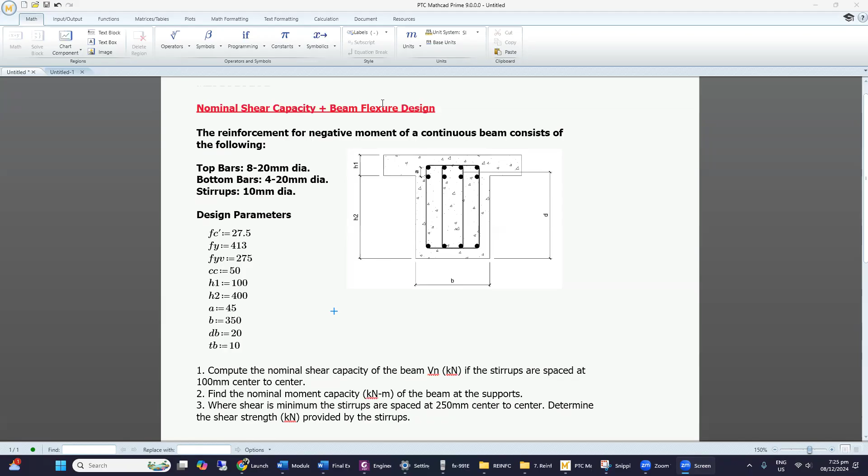Okay, good day everyone. So we have a sample problem here. The topic is all about shear capacity plus beam flexure, combined. The question involves shear capacity and nominal capacity of the beam.

So for the sample problem, given is 8 pieces of 20 millimeter diameter bar as top bars, and 4 pieces of 20mm diameter bars at the bottom. For the stirrups, the diameter is 10 mm.

It says the reinforcement for negative moment of a continuous beam consists of the following. When we say negative moment, the tension is at the top and the compression is at the bottom. So this rebar resists the tension - this is the tension steel. And this one is the compression steel, CS.

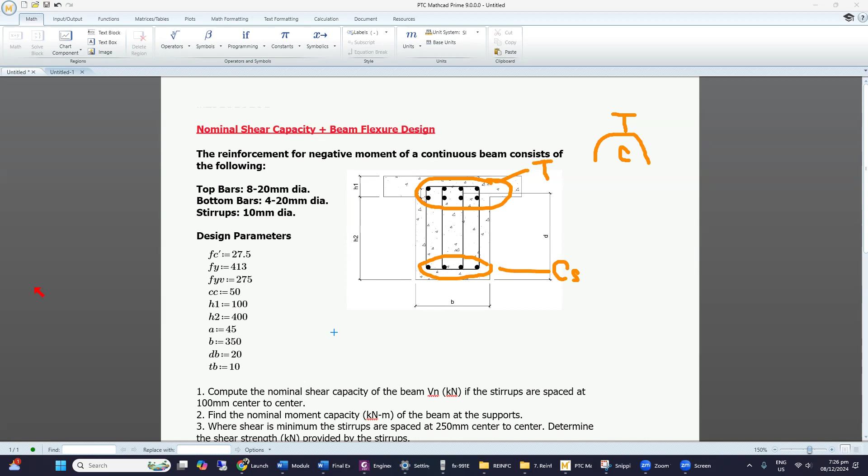If the beam is doubly reinforced, this is included. But if the beam is singly reinforced, this is neglected for the computation of the nominal or maximum capacity. But if it's doubly reinforced, it's really included. So again, this one is the tension steel - that's our T.

So given the parameters: FC prime is 27.5, FY is 413, both in megapascal. We also have FYV, 275. This 413 is the yield strength of the main bar.

That's the main bar, our As. But this FYV, this is for the stirrups - the yield capacity of the steel for the stirrups. CC is the concrete cover, from the extreme fiber to the edge of the stirrups - edge, not the center.

It's at the edge. Then given H1 and H2: H1 is the thickness of the slab, H2 is at the bottom. So total depth of the beam is 500 - H1 is 100, H2 is 400, so total is 500.

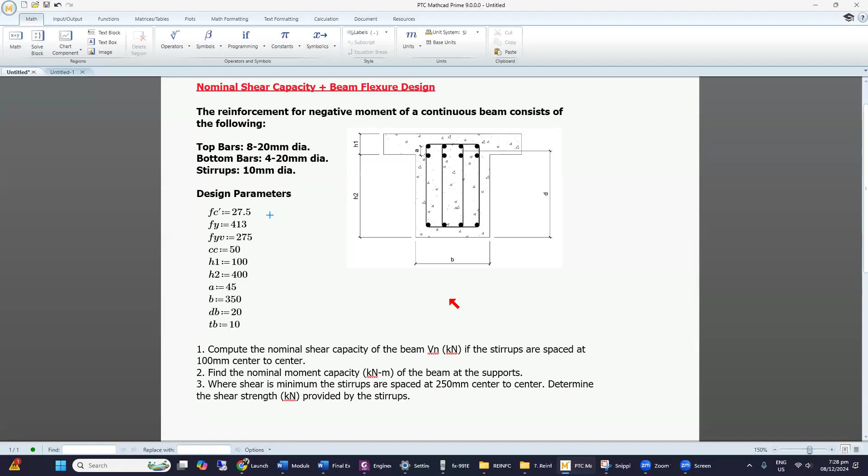So there are three questions. Question one is to compute the nominal shear capacity of the beam, VN, if the stirrups are spaced 100 millimeters center to center. So what's being asked is VN - that's the nominal shear capacity of the beam.

If we recall, VN equals VC plus VS. VC is the shear capacity of the concrete and VS is the shear capacity of the stirrups. We know that VC equals 0.17 times the square root of FC prime,

times B times D. And for the stirrups, the shear capacity is area AV times FY times D over S, where D is the effective depth.

So given the spacing, 100 millimeters, and D is the effective depth. So that's it, it's simple.

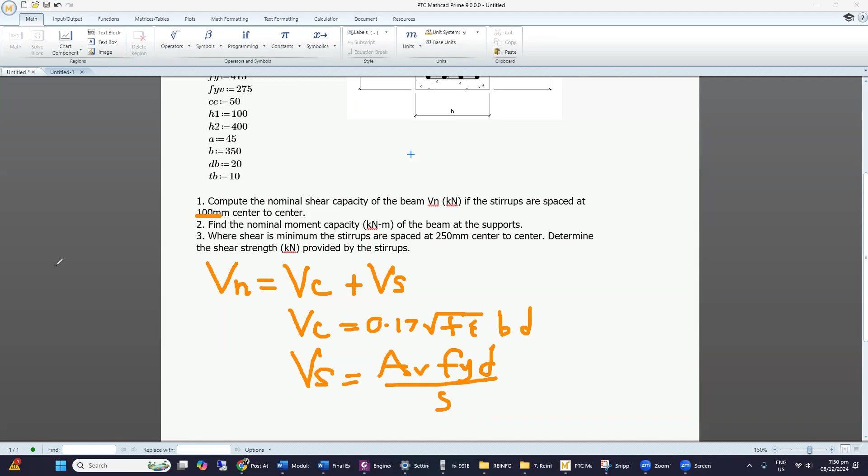Next is number two: find the nominal moment capacity of the beam at the supports. Before we get this, we need to verify first what kind of beam we are analyzing - maybe it's singly reinforced or doubly reinforced. We need to check the type of beam because the capacity is very different between singly and doubly reinforced.

Number three is similar, still about shear capacity of the stirrups alone - the shear strength provided by the stirrups, considering 250 millimeters center to center.

Okay, so let's start with number one: compute the nominal shear capacity of the beam. Let's write the formula for clarity: VN equals VC plus VS. We haven't defined VC yet, which is why it's highlighted in red.

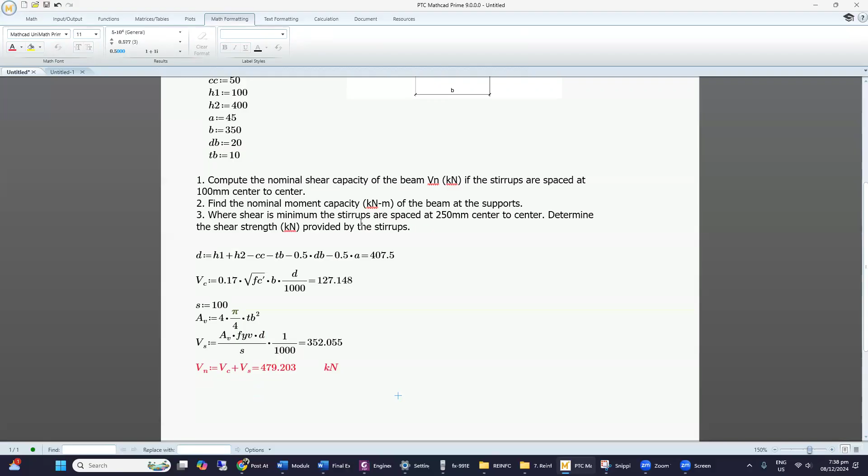Check first the type of beam. Check natin, anong klaseng beam ba siya? Singly reinforced ba siya or doubly?

So how to check? Compute first the maximum steel area that the singly reinforced beam can be provided. Check muna natin yung maximum area na pwedeng natin mailagay sa singly reinforced beam.

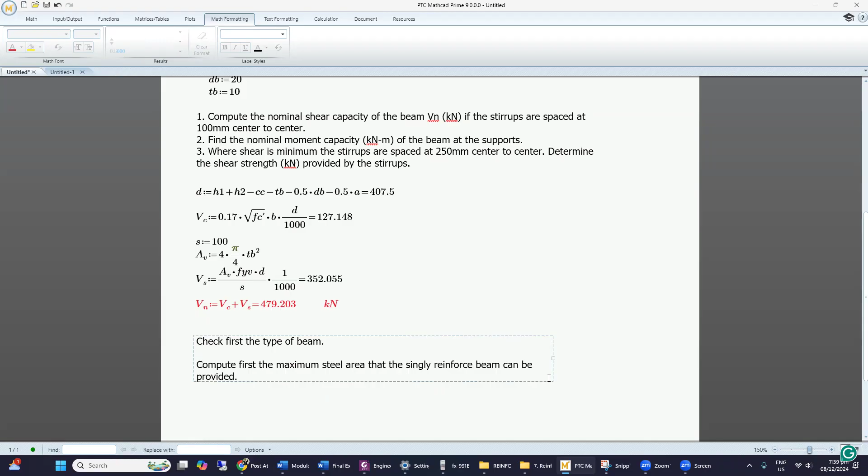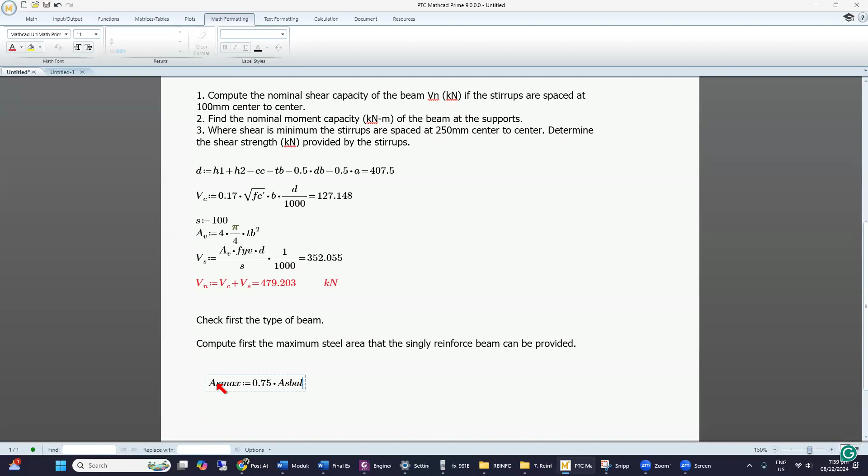Okay, so As max, i-compute natin yung As max. Ano ba yung As max? Yung As max natin is 0.75 of As balance, 75% of the As balance. So balance steel area.

Dapat yung maximum steel area natin is 75% na ng balance steel area. Okay, so if hindi nyo po yan naintindihan, I will discuss natin. Bakit 75%? Okay, so to do that, first is kailangan muna natin i-compute yung actual As provided by the beam.

So ito yun, actual As. So again, ito yung kino-consider natin na tension. Yan yung i-check natin, if singly reinforced ba siya or doubly reinforced.

So As natin is 8 pieces na 20 mm. So i-compute na natin 8 pieces na 20 mm. Okay, ito, copy ko na lang yan.

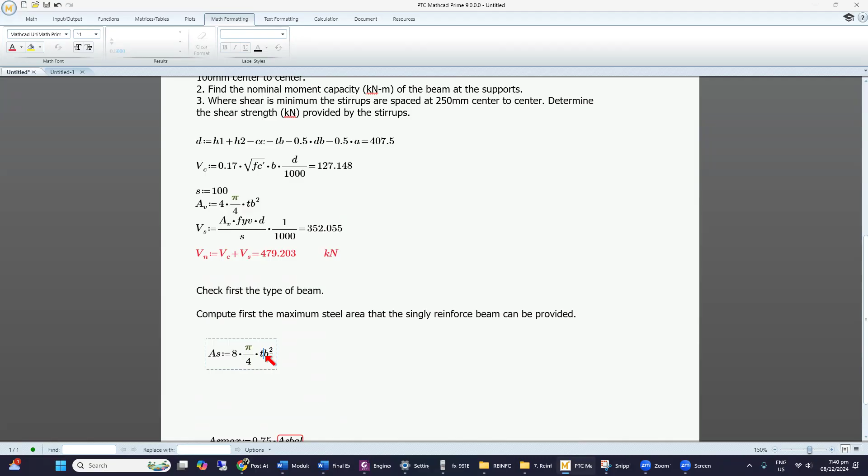Yung lagay natin dito is dB, Diameter of the bar na siya. So 8 pieces na 20 mm. Okay, so that's the area.

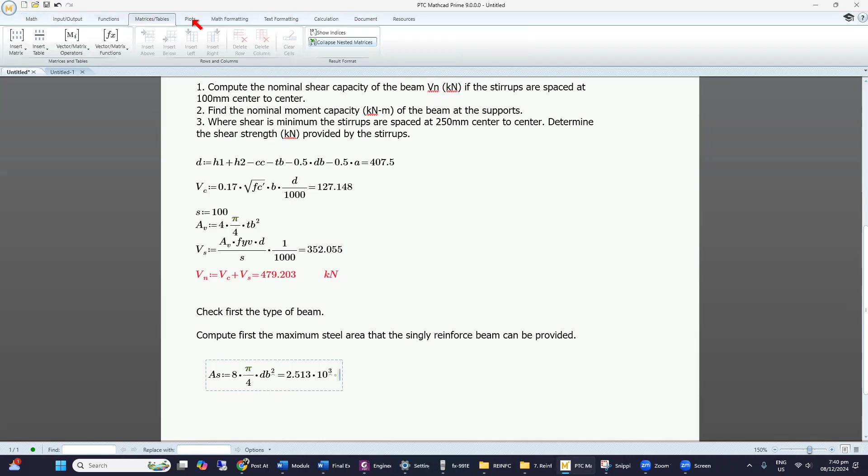So that's 2513.274. If this is less than As balance, ibig sabihin, kapag yung As is less than As balance, ibig sabihin yung steel is nag-yield first. Unang nag-yield yung steel.

Ibig sabihin, Fs natin is equal to Fy. If yung As provided or yung actual As na nasa section, 8 pieces, is less than As balance, ibig sabihin nag-yield yung steel. Unang mag-yield yung steel compared to concrete. Ibig sabihin, Fs is equals to Fy.

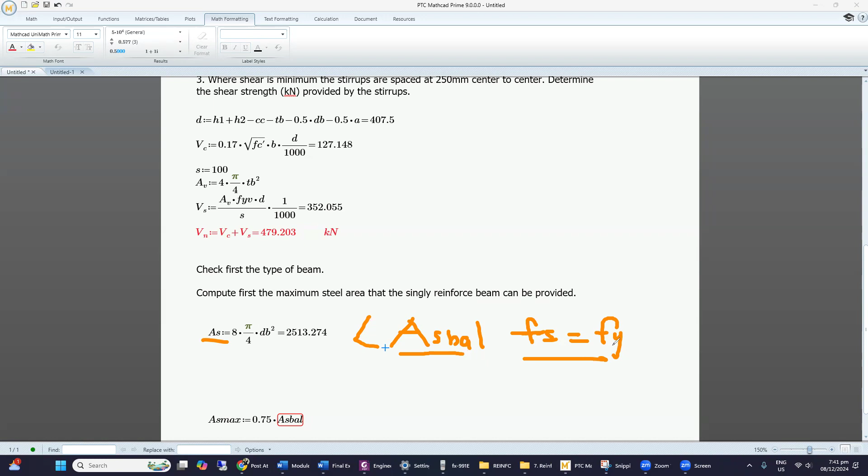So i-check natin kung nag-yield ba siya. I-compute natin yung As balance. Okay, to compute As balance...

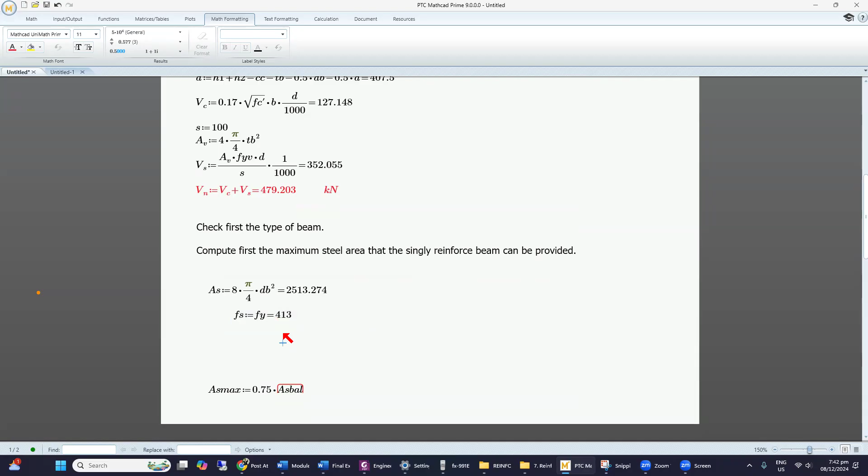We need to assume first na Fs is equals to Fy, na 413. So this is our first assumption. Assume muna tayo na nag-yield muna yung steel before the concrete, na Fs is equals to Fy.

Okay, so with that, meron tayong formula na Fs is equals to 600, D minus C over C. Yan yung formula natin. So with this formula, makuha natin yung C.

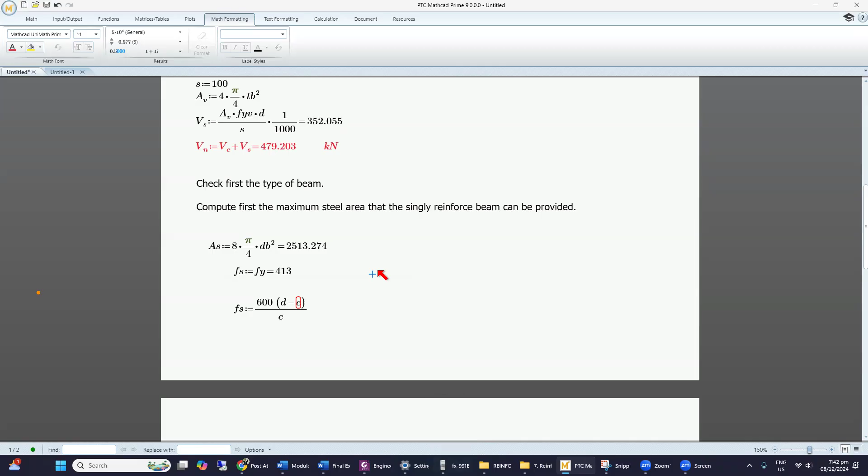Given na yung D, given na yung Fs natin dahil nag-assume tayo na Fs is equals to Fy, yung makuha natin dito is C balance. Okay, so siguro i-compute ko na lang, i-calculator ko na lang. So C balance.

So ulit, nag-assume tayo Fs equals to Fy. So 600 D minus C. So D natin is...

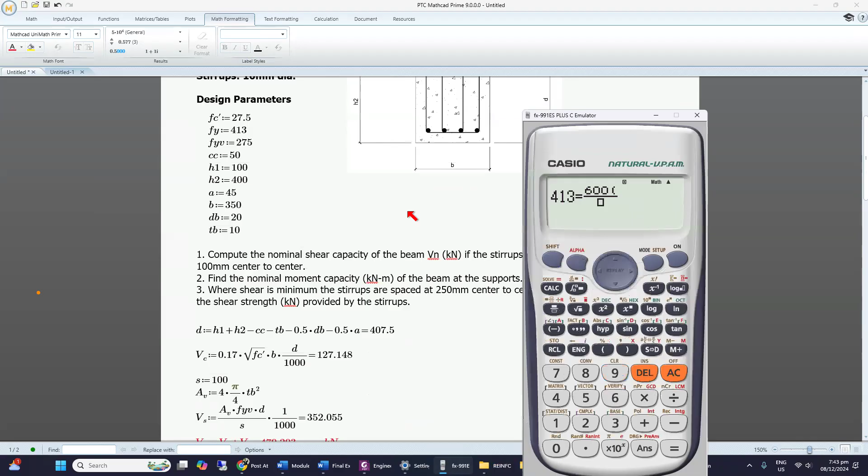Ito, 407.5 minus alpha x, so minus C, itong formula na to over C, so makompute natin C balance. Okay, C balance is 241.36.

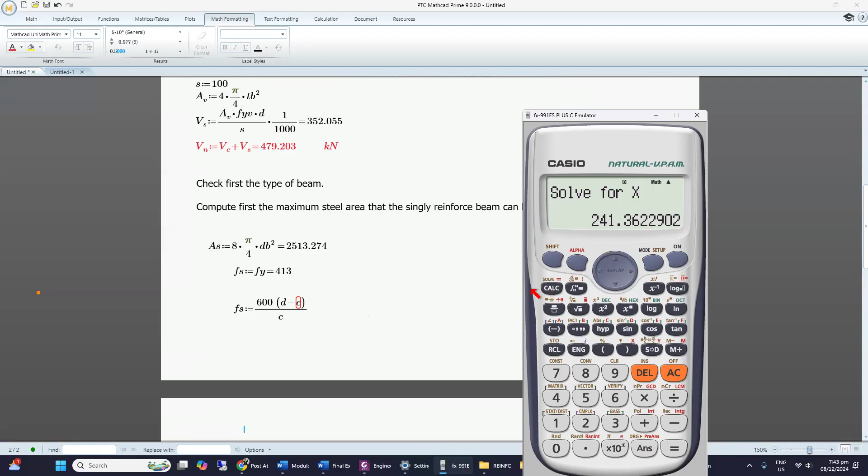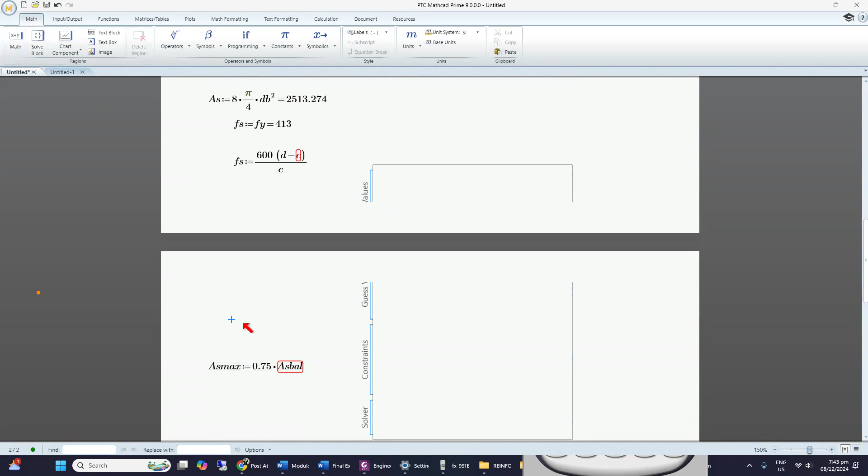241.36. I think pwede naman natin automatic makompute yung C balance. So we'll try dito. We'll try to compute C balance automatic. Yung ganina, kinamit natin is calculator.

Okay, so C is equals to, assume natin na 100 yung C. Then yung solve natin, C is equals to, find C. Wag na lang, calculator na lang. Okay, C natin, so Fs is equals to Fy, di ba? So makuha natin si C. So that C is the C balance.

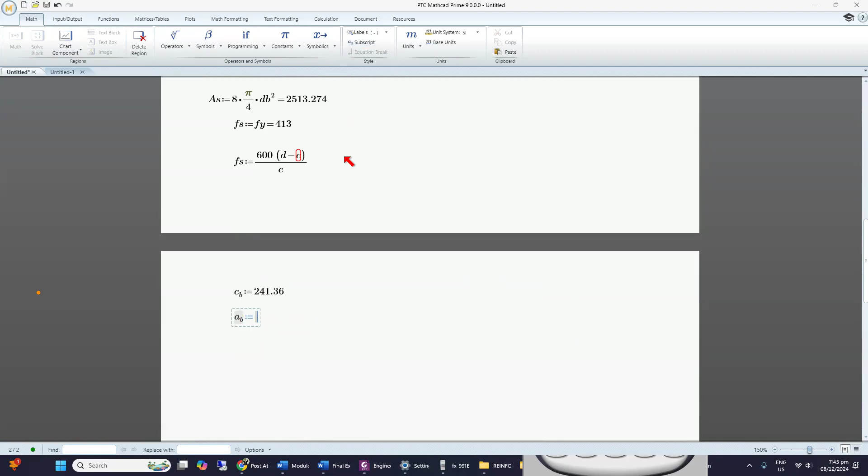C balance is equivalent to 241.36. So with that, we can compute for the depth of the compression fiber at balance condition, AB, which is beta times C. Beta natin is 0.85 because FC prime is less than 28. So 0.85 times CB.

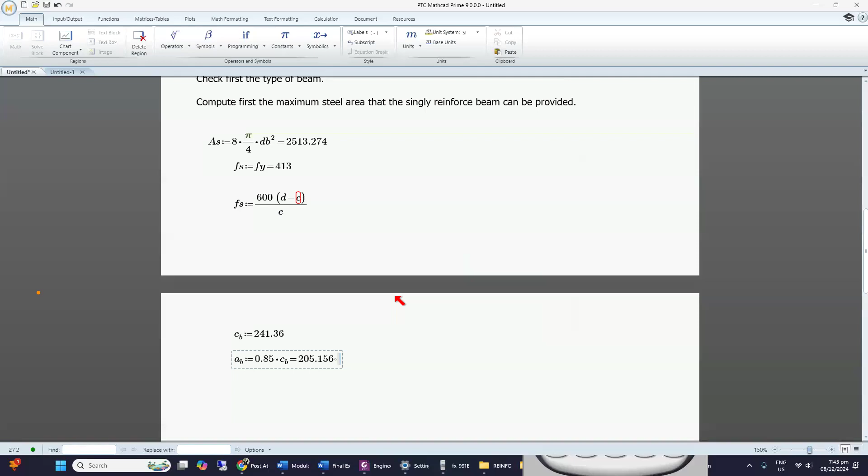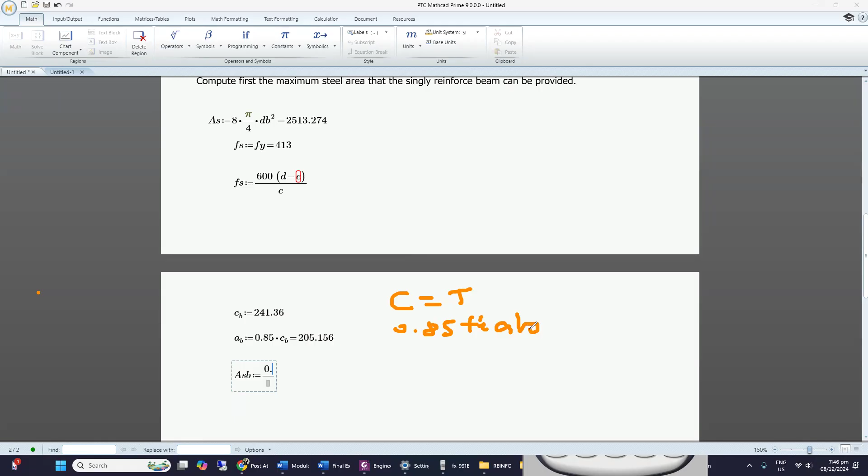Yan, so ito na yung AB natin. So with this, we can compute for the As balance. ES balance is just, if ma-recall natin, C is equals to T, compression, tension. C is equals to T: 0.85 FC prime times A times B is equals to As times Fy.

So with this, given yung, i-compute natin is the ES balance. Yan, ES balance. So given yung Fy, given yung 0.85, yung FC prime, yung A times B, so with this makompute natin si ES balance. Okay, 0.85 FC prime.

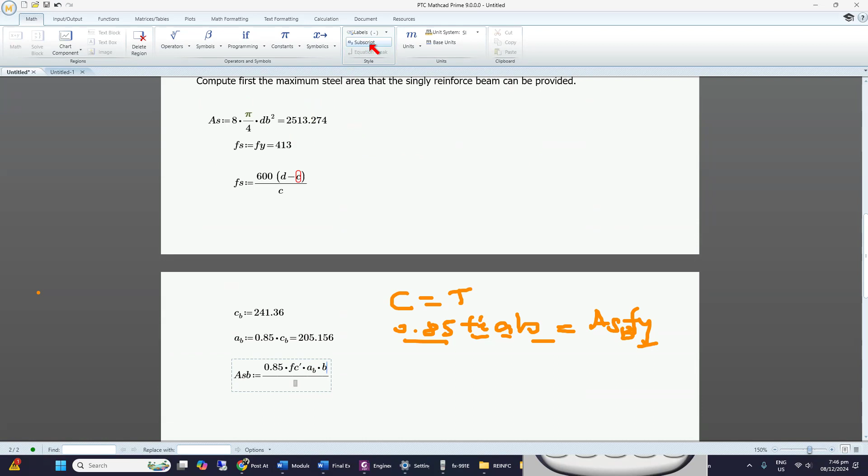So this should be A balance, AB, times B. Okay, B natin given na yun. Ito, B is 350. So over Fy. So ES balance natin is... saan na yun?

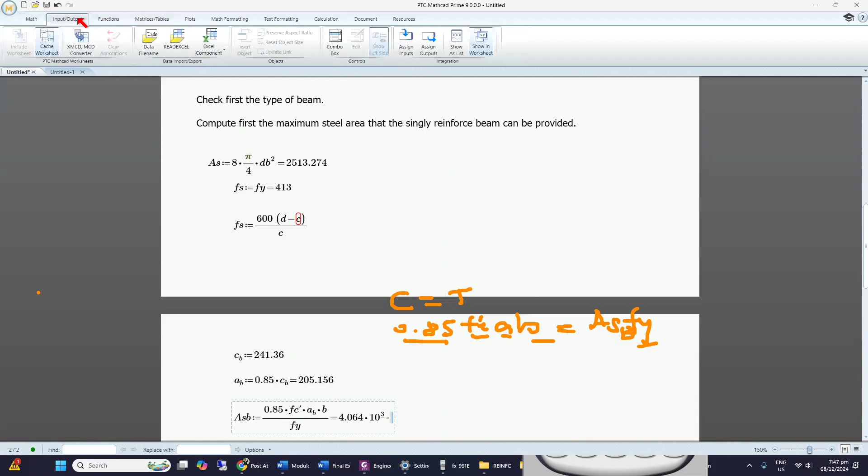As balance natin is 4064. So if we try to compare this to the actual ES, kita natin na yung As is less than As balance.

Ibig sabihin, nag-yield yung kuha natin. Nag-yield yung steel. Steel yield first, no? Yung tension rebar is nag-yield first. Okay, so with that, since nag-yield siya, Fy na yung gagamitin natin. So tama na to, tama yung assumption natin kasi nag-yield siya.

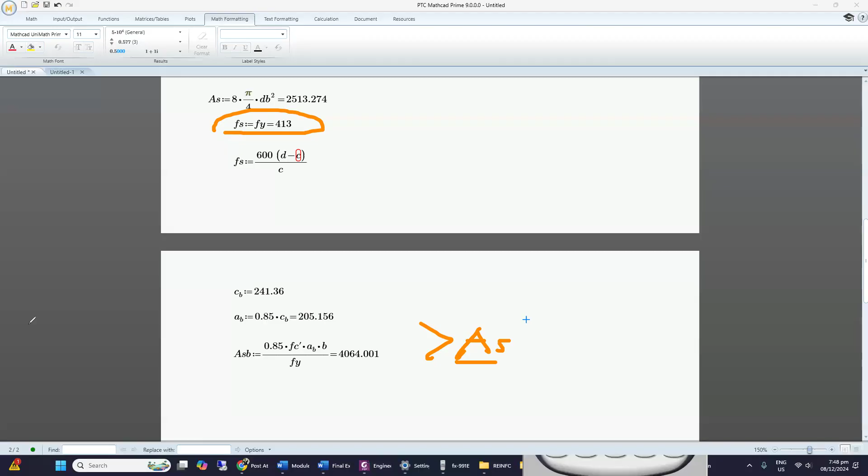Ah, if ever hindi siya nag-yield, no? If ever yung ES natin is greater than ES balance, hindi siya nag-yield. So mali yung assumption natin kanina, so mali ito, iba ito. Kapag hindi nag-yield, yung unang assumption natin is hindi siya tama. Okay? But since nag-yield siya, tama yung assumption natin, kasi yung ES balance is greater than ES. So masyadong maliit yung bakal na pinaprovide, kaya nag-yield siya.

Okay, so with that we can compute for the ES max. This is the maximum area that the singly reinforced beam can be provided, As max is 0.75 times As balance. Yan, so As max is 3048, still greater than As. So meaning to say, it is confirmed that this beam is singly reinforced only.

Singly reinforced beam. So with this, to compute for the nominal moment capacity of the beam, yung formula is just Mn is equals to, since nominal capacity yung hinahanap, no need to multiply reduction factor. It is only As times Fy, kasi nag-yield siya.

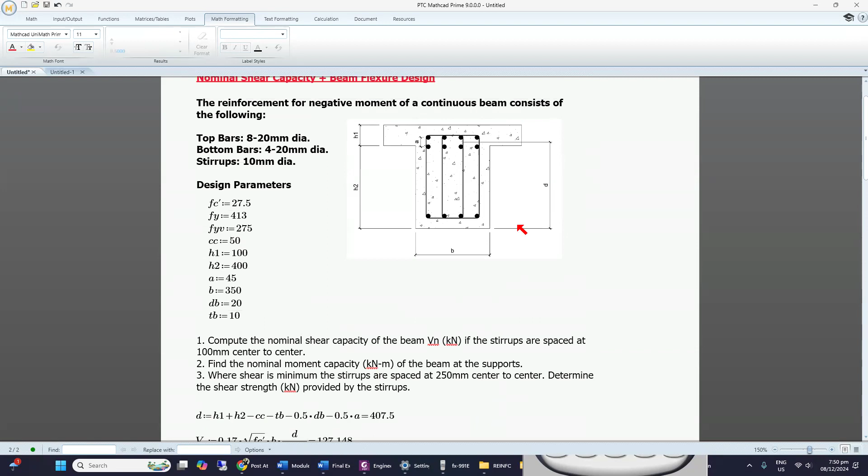Tapos, moment arm. Moment arm natin is D minus A over 2. Kasi yung compression fiber is nandito, yan, so yung distance is ito, papunta dito, so ito sa point na to. This is D minus A over 2.

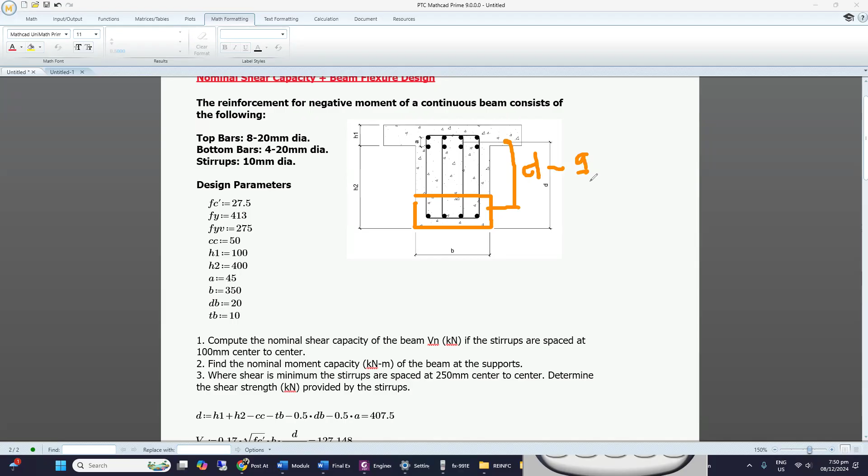So with that, continue natin. So As fy d minus a over 2. Ikot ko muna, decimal. Es Fy d minus A over 2.

Pero yung gamitin pala natin na A is dapat yung actual A. Actual A ng rebar na to. Okay, actual A na to. So with that, i-compute natin yung actual A. Para ma-compute yung actual A, still the same.

Ito yung formula, C is equals to T pa rin. We know that 0.85 FC prime AB, yung C natin, is equals to As fy. Given na yung As, given na din yung FY, nag-yield siya, confirm. Then 0.85 FC prime, tapos yung B. So yung kunin natin is yung A, actual A.

Actual a is equals to As multiplied by fy, divided by 0.85 multiplied by FC prime. Sorry, sorry, yung a niya is As fy divided by 0.85 FC prime AB, hindi BD. Should be AB, no? So wala na to, yan, 126.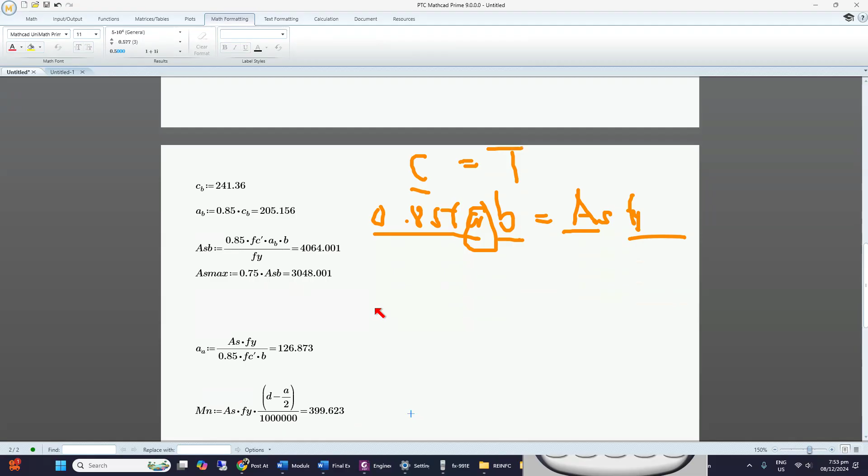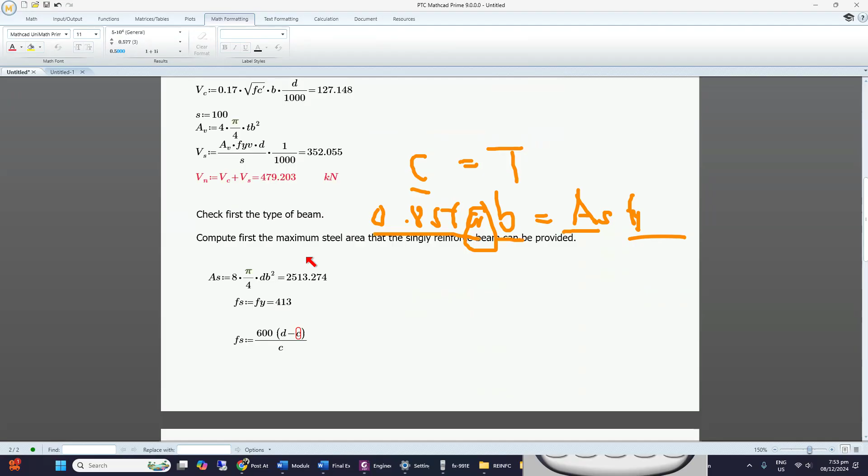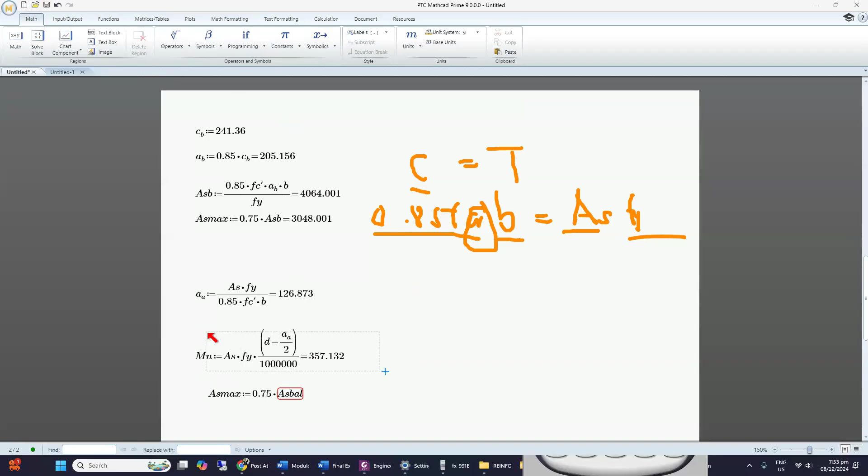So ES max, ES natin, yung ES natin is ito, 8 pieces. So 0.85 FC prime AB divided by FY. Tama naman siya. So ES FY, ES times FY times D minus, this A must be A actual. A actual pala yan. Okay, yan, so ito na yun, ito na yung tama, 357. That's the nominal moment capacity of the beam. Yan, ito, ito na yung sagot sa question number 2.

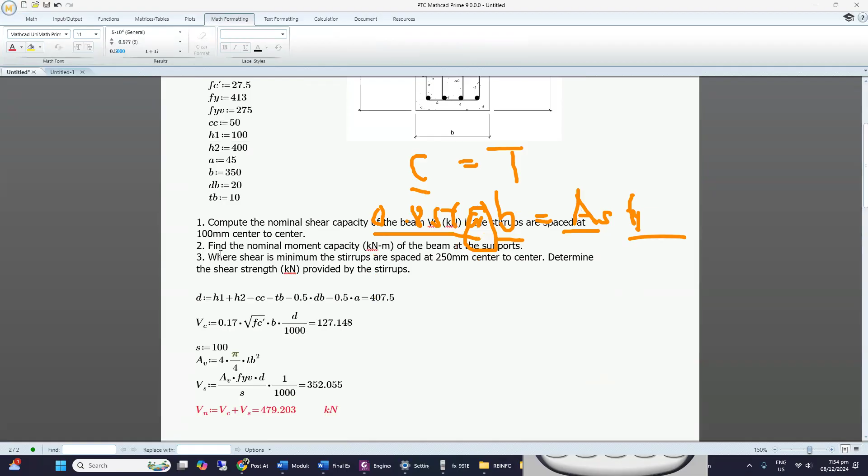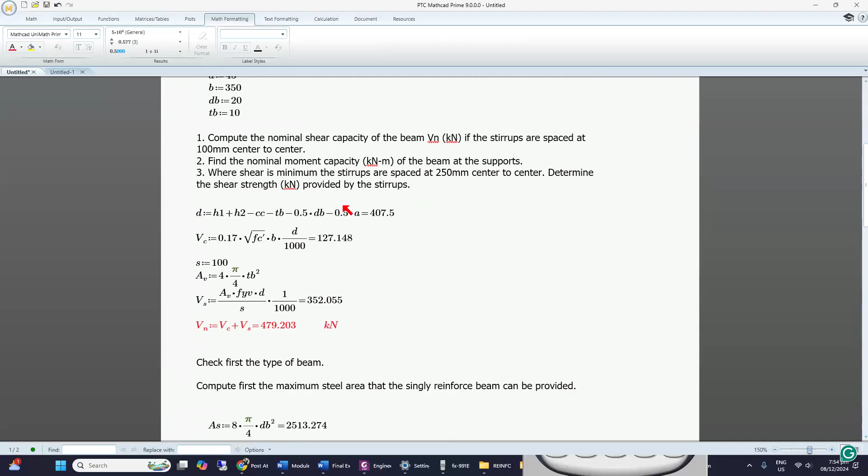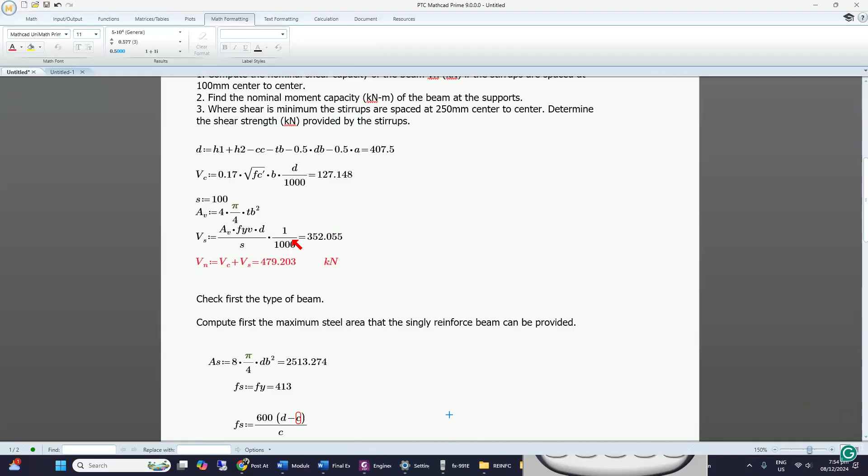Next is question number 3. Where shear is minimum, the stirrups are spaced 250 millimeters center to center. Determine the shear strength provided by the stirrups. So VS yung hinahanap. I think meron tayong formula ng VS dito. So ito yun, yan, copy ko na lang.

So VS natin. Sabi daw 250 millimeters. Okay, so ito is 250. So this is 250. Tapos yan, tama yan.

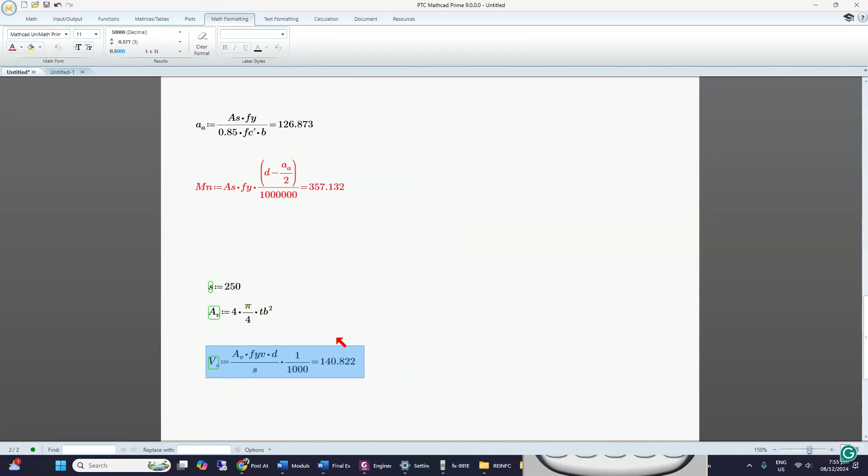EVFYDVS, yung spacing na lang. So tama yung spacing 250, EVFYD. So yung VS is, double check natin, no? Ding, ding, ding, ding. So 250, so tama naman siya. So answer is 140.822, o pwede siya mag-round up into 141.

So yan, so that's how to solve this problem. Thank you.